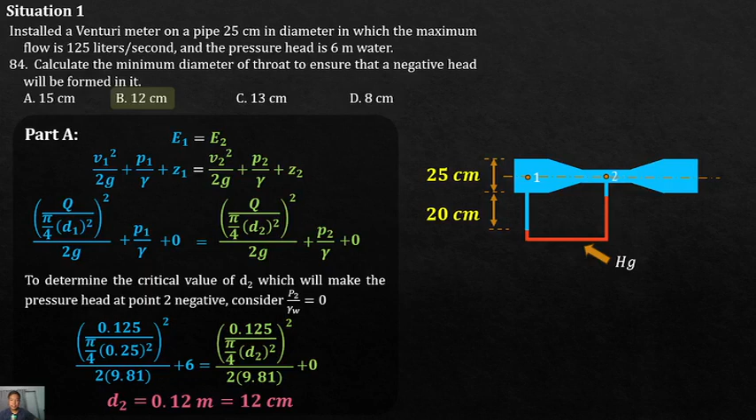Answer for number 84, letter B. Any question on this one? Okay, so I guess wala nang question. Let's now proceed to number 85.

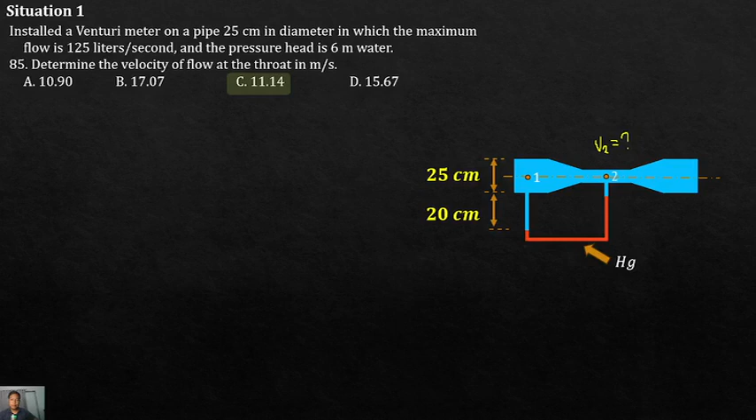So yung tanong, determine the velocity of the flow at the throat in meters per second. Bali yung velocity at point 2 yung tinatanong. Ngayon, para dito, yung equation natin na gagamitin is just yung equation natin for velocity, with respect to the given Q and yung value ng D2 na na-compute natin from part A. So Q again is 125 liters per second, that is 0.125.

Over pi over 4 times yung value ng ating diameter at point 2, at yung 4 decimal place is 0.1195. So makukuha natin ang value of velocity at point 2, and that is 11.14. Letter C.

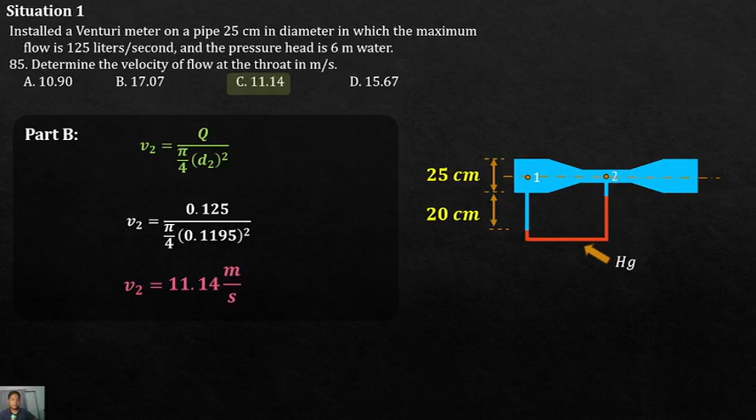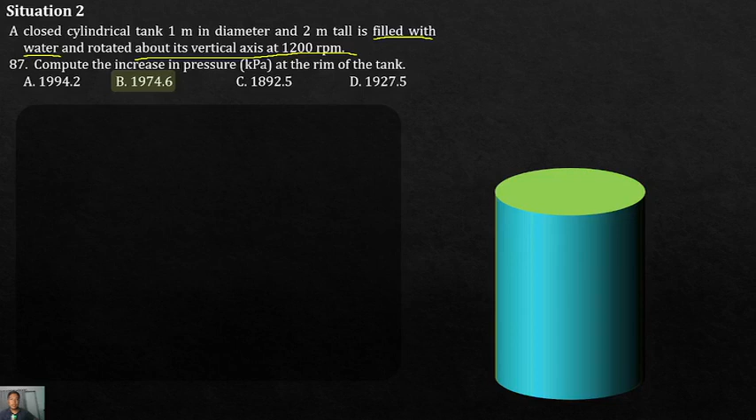So we have here a closed tank that is filled with water. Binanggit po dito na punong-puno yung ating tank. Even if it's filled out, sinabi sa problem na the tank is still rotated about its vertical axis at 1,200 RPM. Take note natin yung diameter ng tank natin, that is 1 meter, at meron siyang length o height na 2 meters.

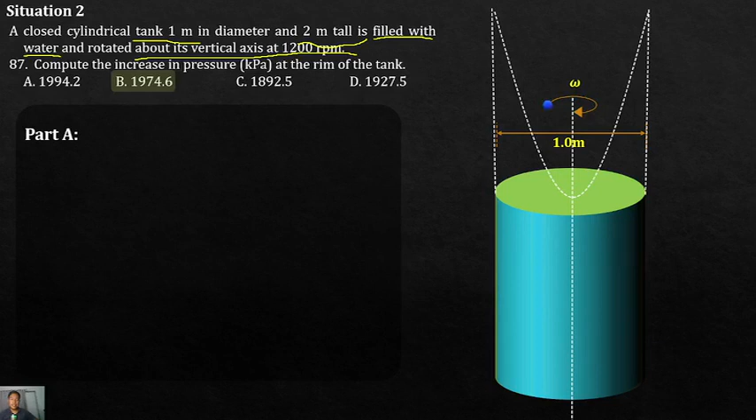Kapag pinaikot yan, kapag puno po, yung free body diagram ng ating paraboloid is an imaginary paraboloid na sa taas ng ating tank. Ganyan po ang ating paraboloid o yung ating mangyayari sa ating tubig. Again, that's imaginary kasi po closed yung ating tank.

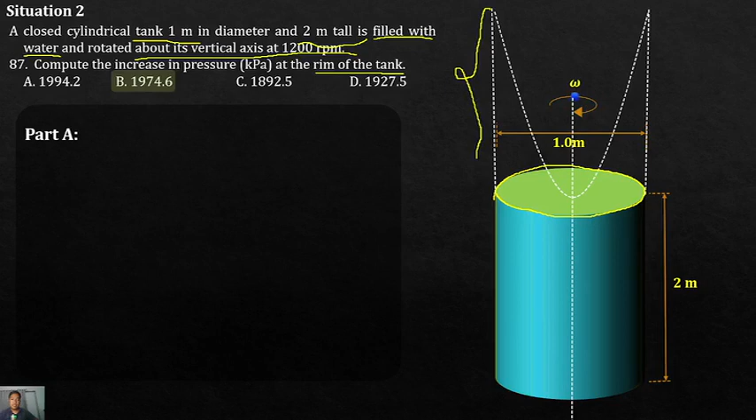So first, para malaman natin yung binabanggit po palang rim of the tank — yun po yung baba ng ating tank, bali dito. At sa illustration natin, since two-dimensional lang yan, yung palibot sa rim is represented by the pressure dito sa gilid ng ating imaginary paraboloid. So initially, nung hindi pa pinaikot, yung pressure is with respect lang at this height.

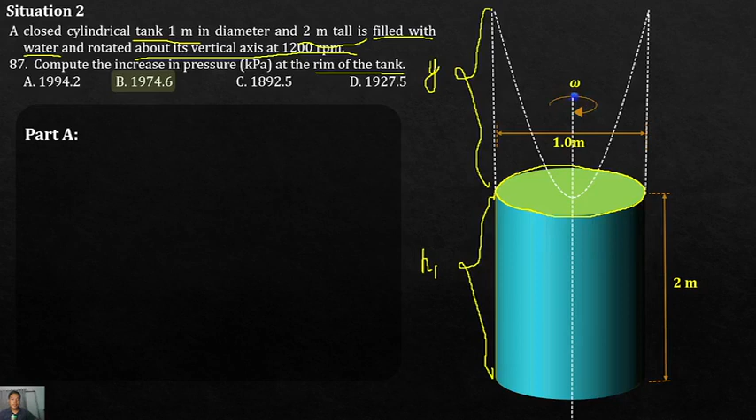Ibig sabihin, yung increase ng pressure sa rim ay caused by the height of the paraboloid, dahil tubig din itong part na to — this part right here, that's water sa imaginary paraboloid natin. So since hindi naman binanggit yung total pressure sa rim, ang tinanong ay increase in pressure, at ang increase in pressure ay caused by the paraboloid. Therefore, ang kukunin lang natin is yung value ng y dito sa inangat ng ating paraboloid.

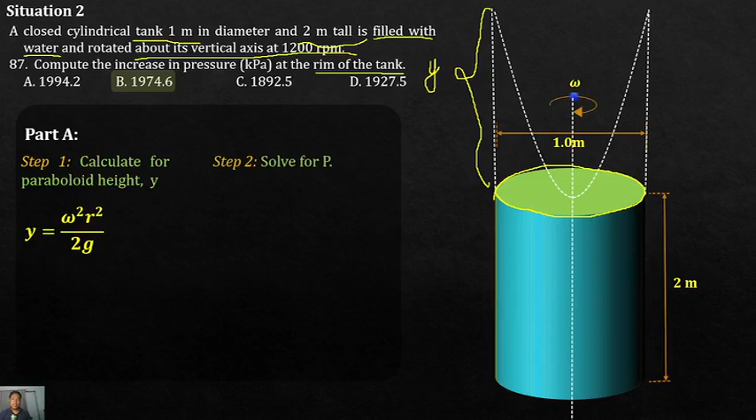Step 1: calculate for the height of the paraboloid, y, at that is omega squared r squared over twice the value of our gravity. Once na-compute mo na yung y, next step is i-compute mo na yung pressure, at that is just product — alam naman natin yung formula ng pressure, gamma height lang po yan. That is gamma ng liquid, in this case water, times yung height ng ating paraboloid. So pag kinompute mo yan, yun yung pressure dito sa gilid, at that represents the additional pressure sa rim ng ating tank. Nakuha po ba?

So, that's the framework of our solution. Now, since we already have the value of omega, that is 1,200, we have the value of the diameter, that's 1.0.

Let's get half of that, that would be the radius. And the value of gravity, that is constant, 9.81. So we can now compute for y. That would be the value of omega, 1,200, times the conversion factor, don't forget, RPM to rad per second, we need to multiply by pi over 30. Times, don't forget to raise that omega to the power of 2, times the radius, so half of 1.0, so that's 0.5. And then 2 times the constant value of gravity or our gravitational acceleration, and that is 9.81. So you now have the value of y, and that would be 201.284.

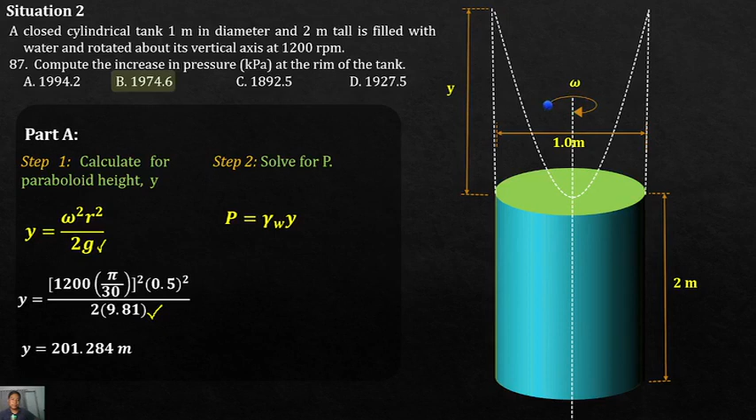Now, if we compare that with the height of the tank, 2 meters, so it's very far, very tall, our height of the imaginary paraboloid, 201.284. Now, we don't stop there. We just finished step 1. Next, multiply that with the value of the unit weight of water so that you'll be able to compute the pressure at the paraboloid, which contributes to the increase in pressure at the rim. So let's substitute, unit weight of water, that's 9.81, times the value of the height of the paraboloid so that we can now finally compute for the pressure at the rim. So, if you use your calculator, you'll get the value of P, and that is 1,974.595 kilopascal. Letter B.

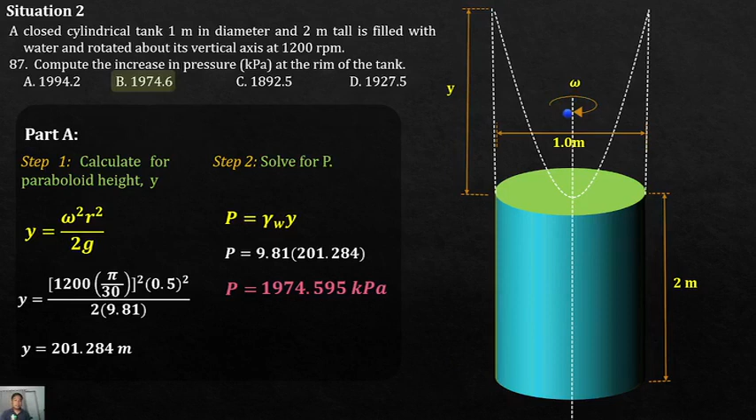Next, number 88. Compute the increase in pressure at the center bottom of the tank. So, if you look at our paraboloid, here at the center, there's nothing there. We don't have the height of water there. That means there's no increase in pressure here at the center. That means the answer is 0. So again, the analysis there, that's why we don't have height there. Because whatever is the height of the paraboloid, it always touches the top surface of our tank. And that only happens if we have a full tank. So, that means the vertex of our parabola is always at the top of our tank, when we draw the imaginary paraboloid, if our tank is closed. So, that means pressure at the center is equal to 0.

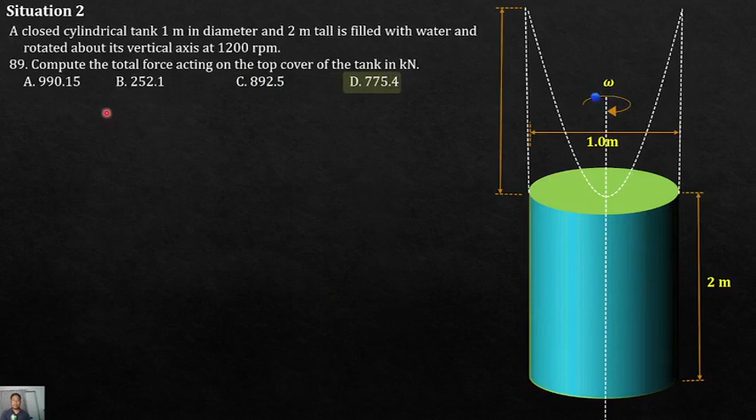Next problem, problem 89. Compute the total force acting on the top cover of the tank in kilonewtons. So, in analyzing this, remember that the water at the top is this. So, the pressure of the imaginary paraboloid that is exerted towards the top surface or the top cover of the tank, we have there a pressure force. Okay, let's call that F1. So, the question is, let's call it F1.

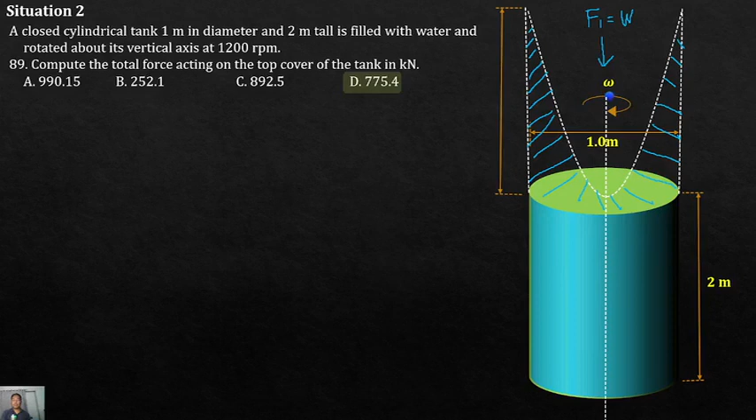So the question, how are we going to compute for the force applied by the pressure of this imaginary paraboloid at the top? Now, since we're solving for force, actually that's equivalent to the weight of the water. So, the force that is applied by the water there is just simply the weight of the water at the top of our tank. That's the weight of our imaginary paraboloid. And we have a formula from curved fluid statics, that the weight of water on a curved surface is equal to unit weight of the liquid, in this case water, times the volume. Right? And that's what we'll do here.

That's our analysis. Let's just get the weight of the water at the top of our tank cover. And that's it, that's the total force acting there. Now, the challenge here is how do we compute for the volume of water here? Now, if you remember, the volume of the paraboloid, in this case, it's just air, has nothing in it, is half of the area or half of the volume of our cylinder, right? So the formula is 1/2 pi r squared y. Because actually, the volume of the paraboloid is half of the tank given our y.

So, that y, that will be the height of our imaginary tank. The volume of the paraboloid is half of the volume of the cylinder that this parabola or paraboloid can fit into. So, that means if the volume of the paraboloid is half of the volume of the cylinder, so the volume of the water is also equivalent to the other half. This is also how our computation of the volume of this water will turn out. That is 1 minus half of the volume of this paraboloid, and that is just equal to 1/2 pi r squared y.

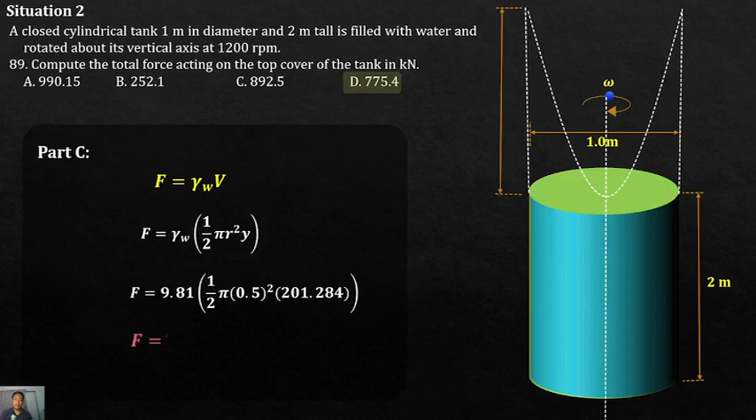So, unit weight of water, walang problema. We know that value as 9.81 kasi kilonewtons yung question. Radius, so kalahati lang po ng 1. Yung y is yung na-compute natin na 200 plus value kanina. So, substitute lang po natin. Then, we can now solve for F directly. That is 775.4 kilonewtons. Letter D.

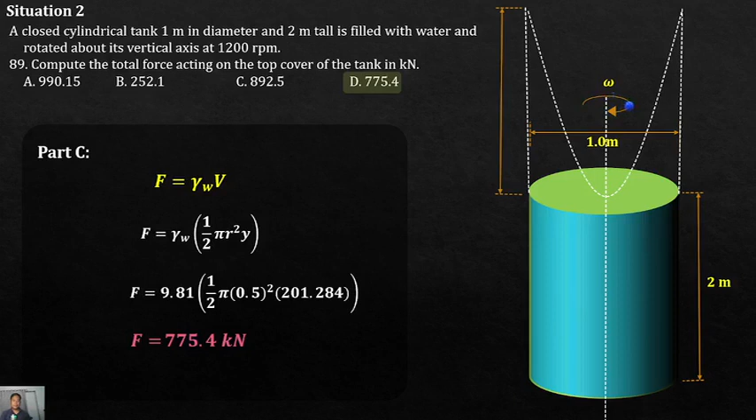Next, solve natin yung situation 3. So, I think this is a repeated problem. Lumabas din to nung module 1, no? So, I hope na nakuha din ninyo yung solution dito. Now, itong problem na to, isa to sa according sa statistics, nahirapan yung mga students during sa module 1. So, paano ulit ito sinolve? So, basahin muna natin.

Situation 3: a pump with a shaft input of 7.5 kilowatts and an efficiency of 70% is connected in a water line carrying 0.123 cubic meters per second. The pump has a 150 mm diameter suction line and a 120 mm diameter discharge line. The suction line enters the pump 1 meter below the discharge line. For a suction pressure of 70 kilonewtons per square meter, we're asked to solve the following: calculate the energy added per unit weight of water.

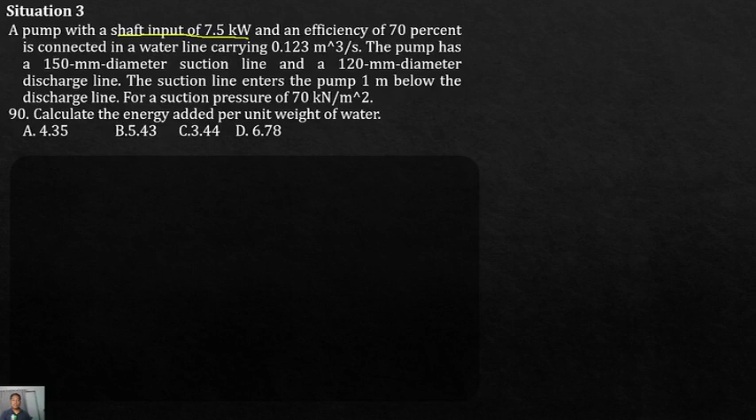Ayan, so for this one, we're given the shaft input of 7.5 kilowatts. So, pag sinabi mong shaft input, we're referring there to the power input. Power input is 7.5 kilowatts. And then you're also given the efficiency of 70%. Efficiency equals 70%.

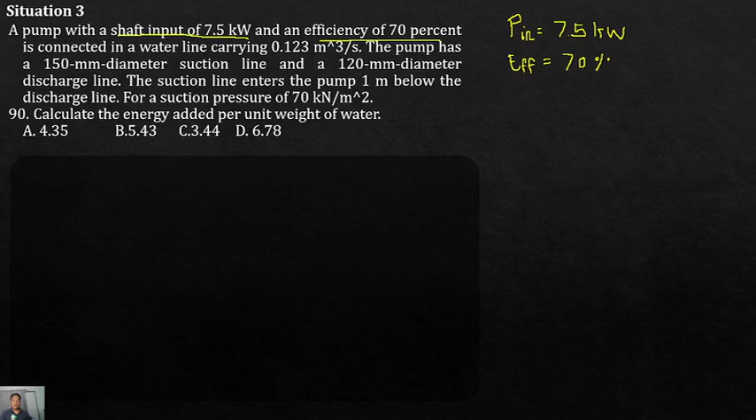And is connected in a water line carrying 0.123. So if this is our pump, ayan, meron pala akong mga values na given dito. So our input is 7,500 watts, bale 7.5, no, convert lang natin yan sa watts, times 1,000. Kaya naging 7,500 watts. Efficiency of the pump that's given 70%. Yung Q din natin given 0.123 which is mentioned here. Just ko lang to para hindi redundant.

The pump has a 150 mm diameter suction line. So ito po yung pump natin and kung papansin nyo meron tayong dalawang hole. So for the suction, dito po yan nangyayari. Suction. So yung horizontal yung suction natin and yung ating discharge is vertical. Discharge. Okay? See.

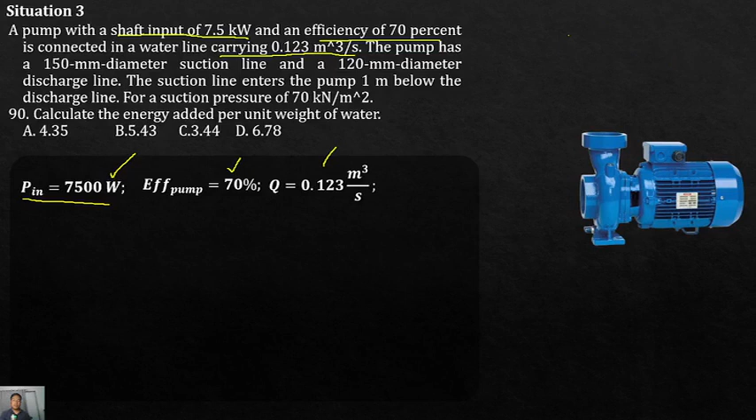So, yan yung pipe natin for suction. So, subscript S, yung gamit natin to denote suction. Ang given na diameter for the suction line is 150 mm diameter, and that is 0.15. Kuha po. So, dinivide lang yan sa 1,000. And a 120 mm diameter discharge line. So, yung discharge po natin is again yung paakyat. Discharge is denoted as subscript D here for the diameter, and that is a value of 0.12.

Binanggit dito, the suction line enters the pump 1 meter below the discharge line. So, paano natin yan i-interpret? The line of suction is 1 meter below the discharge line. Okay, so gawin na natin reference yung ating suction and then count tayo ng 1 meter paakyat. Ganun. So, bali, yung point sa discharge na tinutukoy natin is ganyan lang. Okay, so this will be point 1, and then dito naman, point 2. Okay, ganyan lang. Isasin ko lang to kasi may drawing naman ako.

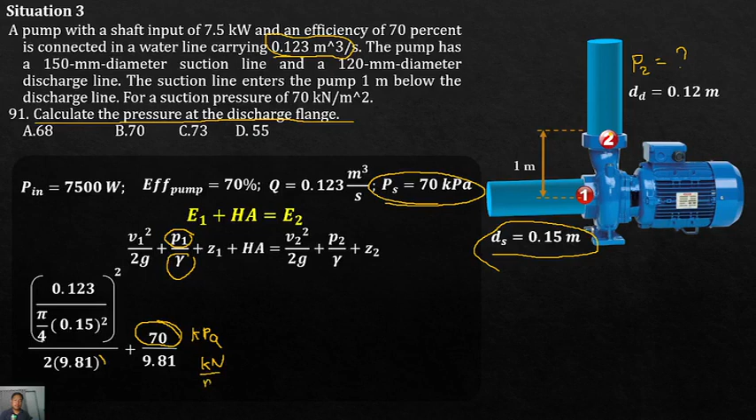Unit consistency, guys. Plus, now take note, for Z1, this point 1 is the lower elevation, so that's what we'll assume as our datum, so that's 0.

Plus head added - that's what we computed earlier, that was 4.35. Okay, equals.

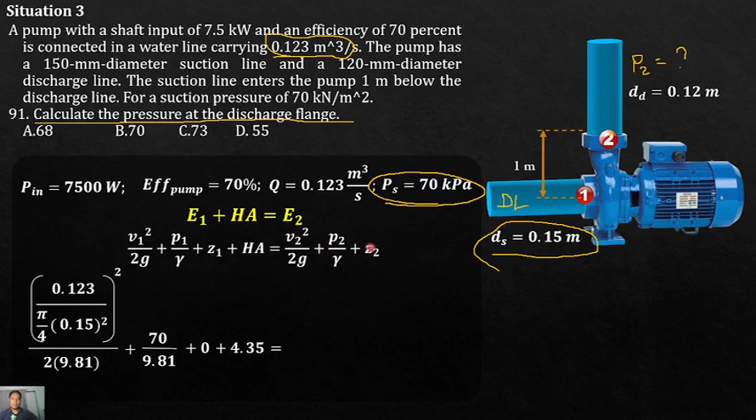Now let's go to the right side of our equation, for the energy at point 2. First is the velocity at point 2, so again Q over A is what we'll use for V2.

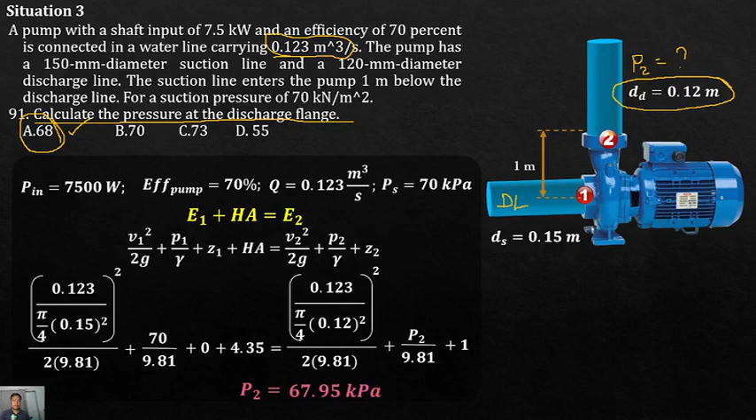Finally, problem 92: calculate the rise in the hydraulic grade line across the pump. So what is the hydraulic grade line? Let's review. The hydraulic grade line is the graph of the total potential energy.

For point 1, it's the sum of the pressure head at point 1 and the elevation. For point 2, it's the pressure head at point 2 plus Z2. If you add velocity head to that, it becomes the energy grade line.

Let's plot this so it's more visual, making the solution easier to understand. So, calculate the rise in the hydraulic grade line across the pump. Remember, this is what we need. For Z, remember that point 1 is our datum, right?

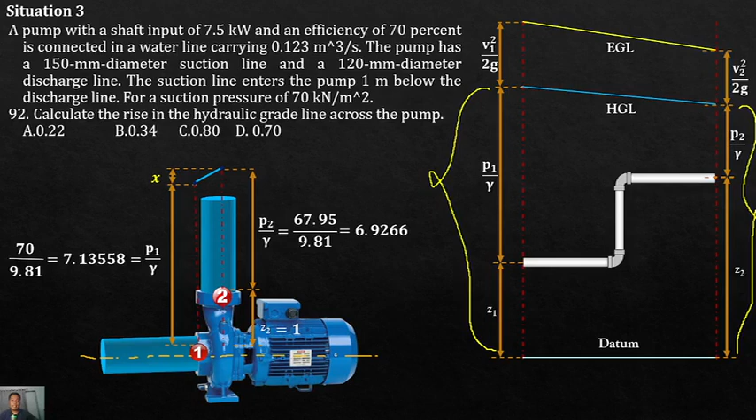Yan na yung inangat ng ating energy or potential energy. Yan yung tinatanong dyan. Since meron naman tayong height ng right side, which is mas mataas, add mo lang sila.

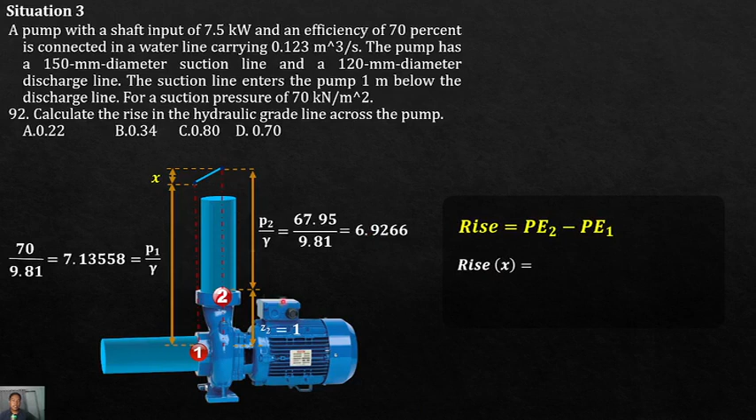Yung potential energy sa kanan at point 2, that is 1 plus 6.9266. Inad lang natin si 6.9266 plus si 1, so that's why we have that value for potential energy at point 2. Minus potential energy at point 1, ito po yun, 7.13558. Solve natin, we'll get the value of rise.

And that is 0.7912. The answer there would be letter C.

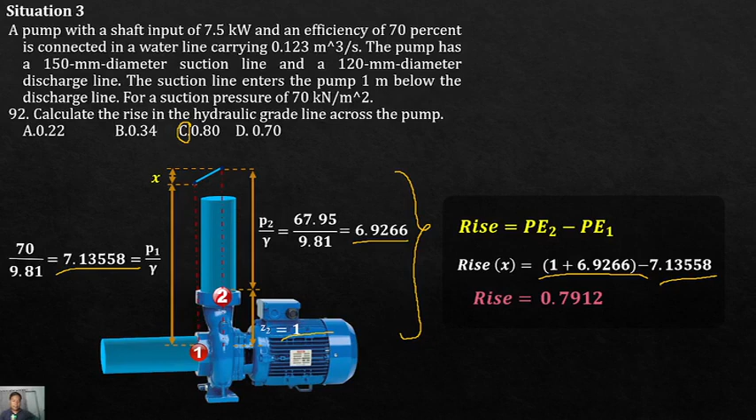Sige, so let's continue for situation 4. A horizontal cylindrical pressure tank is 5 meters long and 0.8 meters in radius. The tank is filled with equal volume of seawater with a specific gravity of 1.025 and oil with a specific gravity of 0.76. The pressure gauge at the bottom of the tank reads 40 psi. Take note ko lang dito, ang reading daw is 40 psi.

Now the question is, what is the pressure at the top of the tank in kilopascal? Ano daw yung pressure dito sa taas? If we're to put here an imaginary gauge pressure, ano yung magiging value dito? Pressure at the top.

Ganito, no? To solve for the pressure at the top, remember yung principle ng pressure: pressure is always measured vertically.

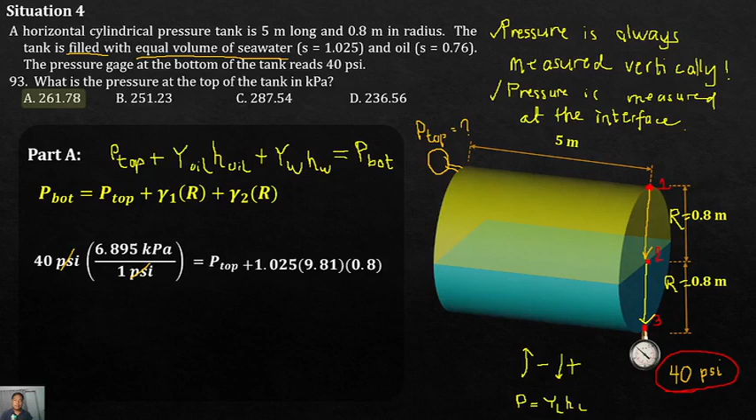Equals pressure at the top, which is unknown. Unit weight ng oil natin, sorry, this is supposed to be 0.76, no? Kasi siya yung lighter one. Anyway, pwede naman tong mag-interchange kasi commutative property, no? So, yung naano ko lang dito is the height, unit weight of the water. So, 1.025, that's the specific gravity of the seawater, times 9.81 times yung radius natin. That would be the unit weight of water. Plus naman po ang unit weight naman ng ating oil. That is 0.76 times 9.81. Yan yung unit weight ng oil natin. Times yung radius ulit, which is 0.8, which is this one. Okay? So, I hope nakuha yun.

And then, kung kompleto na, we're now ready to solve for the pressure at the top. And that would be 261.791. So, that would be letter A.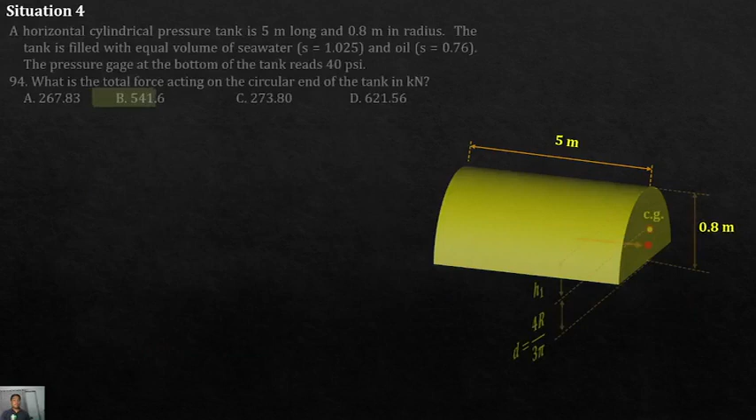Proceed po tayo. Problem 94. What is the total force acting on the circular end of the tank?

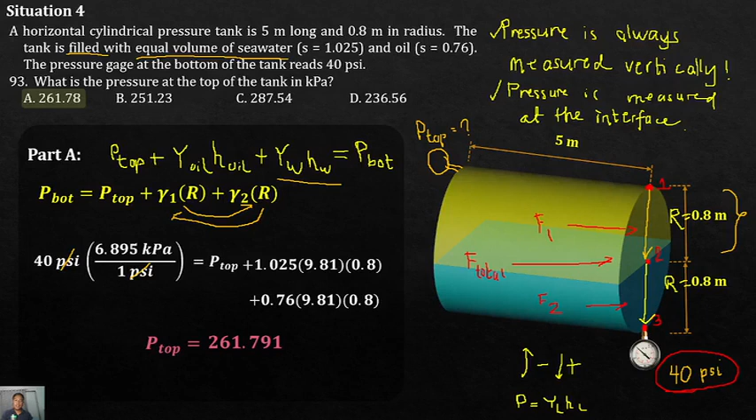Ayan. So, the total force po is, uh, that can be computed. Kunin muna natin no, yung force acting sa oil and then force acting sa tubig or sa seawater. And then kunin natin yung resultant, no, F total. Add mo lang F1 at F2. So solve natin isa-isa no, yung force acting in each liquid. So unahin natin yung force acting dito sa ating tawag dito, oil. Ayan, so F1. Hanapin mo natin si F1.

Now, force po is acting no, at the center of pressure. And for a semicircle, the center of pressure is below the center, the center of gravity is above the center of pressure. Remember, ang tanong is force acting at the end of the tank. So, ibig sabihin, yung area na concern tayo is itong area na to. Yung semicircle.

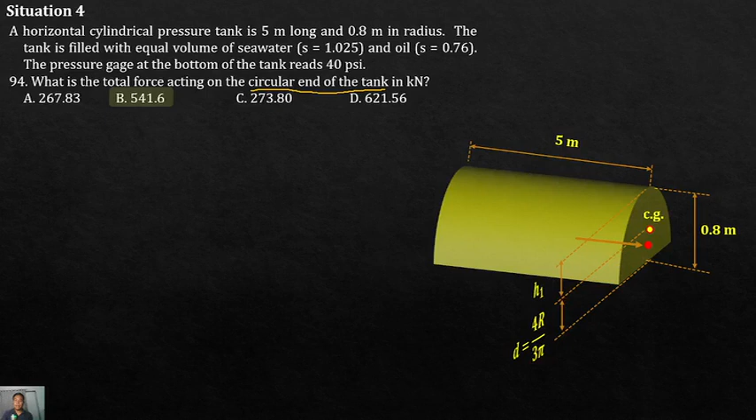Now, alam natin, force, hydrostatic force, diba, is we need to find first the pressure at the centroid. And for the pressure at the centroid, kailangan natin ang value ng H1. So, paano natin mahanap H1? H1 is equivalent to the value of bar H. So, that is from the surface to the centroid. So, we can compute for H1 if we subtract yung radius at saka yung centroidal distance ng ating semicircle. Ito yung formula ng centroidal distance, 4r over 3 pi measured from the base of the semicircle. Dito po, akit ka ng ganyan, 4r over 3 pi. So therefore, H1 is just 0.8 minus D.

Again, from this equation, alam natin, pressure equals force over area. And yung governing equation natin, cross multiply lang to, we'll get the value of F1. Ito yung F1 natin. So, we need to find first the value of pressure. Area, walang problema. Diba? Kalahati lang yan ng area ng circle.

For pressure at point 1, ito yung magiging diskarte natin. So, again, pressure is just vertical measurement. Since sa taas, meron yung pressure, so consider natin yan, plus yung gamma times papunta dito sa center of gravity, kasi pressure sa center of gravity yung kailangan natin. So pressure sa center of gravity is just gamma times H1, which is this height. Now, H1 is R, ito po yung R natin, minus yung ating centroidal distance, D. Diba? Again, ito yon minus this height. So, that would be our H1.

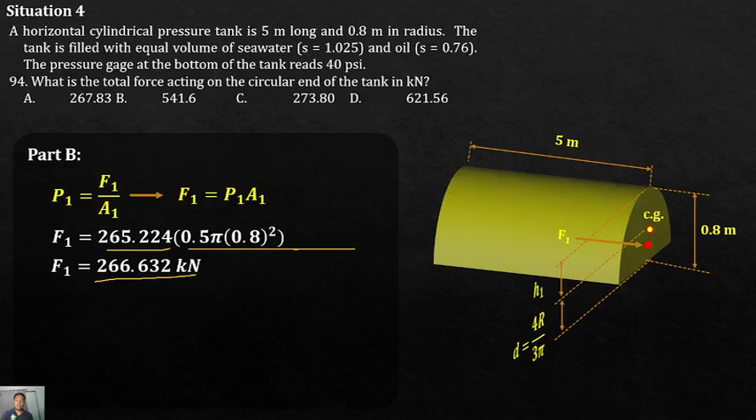So that will get the value of F1. Since kalahati lang yan ng area ng circle, so 0.5 times area ng circle, pi times the radius, 0.8 squared, we'll get F1 as 266.632. So ganyan lang yung pag-compute ng force sa centroid, force acting dito sa oil. So, okay na si F1.

Next, solve natin yung force acting dito naman sa seawater. Again, that force is acting dito po sa center of pressure. Pero, for us to find for force 2, kailangan natin yung pressure dito naman at the centroid. Okay? So, solve natin yung pressure sa centroid.

Again, yung pag-compute natin ng pressure, magsimula tayo dito sa pressure sa top. Plus, again, find the interface. Ito yung pangalawang interface natin. Ang point na to.

So, unit weight times that radius. Compute natin yung pressure at point 2. Since pressure at the centroid yung gusto natin, hanggang dito lang, di ba? Kailangan nating height is yung centroidal distance na, which is this one up until here. Take note, ang centroidal distance po is measured always from the base.

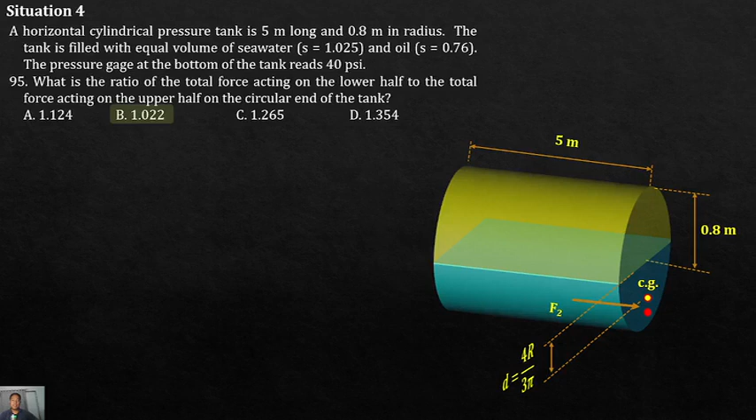So, acting at the lower half, yan po ay ang F2, so F2 yung numerator. And acting on the upper half, is yung F1 naman. So, F2 over F1. Substitute mo lang yung values na na-compute natin, we'll get the value of ratio, that is equal to 1.022. Letter B.

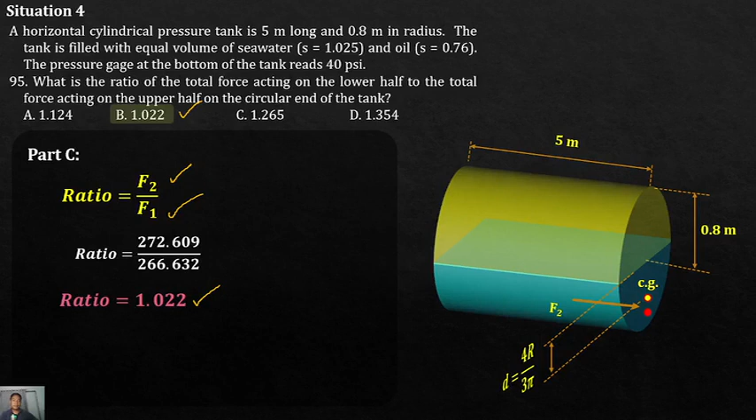Ito, konti lang to. Last na to, situation 5, and then I'll just do another recording for the rest of the problems na hindi ko ma-discuss ngayon.

So, the fuel gauge for a gasoline tank in a car reads proportional to its bottom gauge. The tank is 50 centimeters deep, and accidentally contaminated with 8 cm of water. The specific gravity of gasoline is 0.72. What is the gauge reading when the tank is filled with gasoline? So, ito yung first scenario. We have here the tank, rectangular tank, punong-puno with a height of 50 centimeters.

Okay, so alam naman natin yung formula ng pressure, yan po ay unit weight of the liquid times the height. In this case, the gasoline is the liquid. So, unit weight is just, multiply mo lang, specific gravity, 0.72, times yung ating unit weight of water, and then 50 cm yung ating height. Convert that to meters, that is 0.5. We'll get the value of P, and that is 3.532 kilopascal. Letter B.

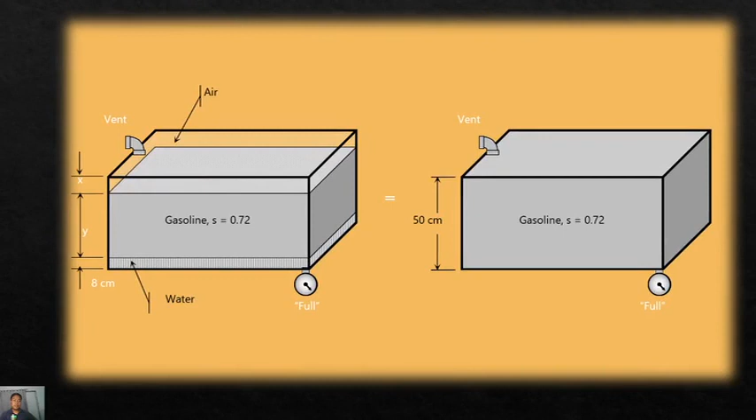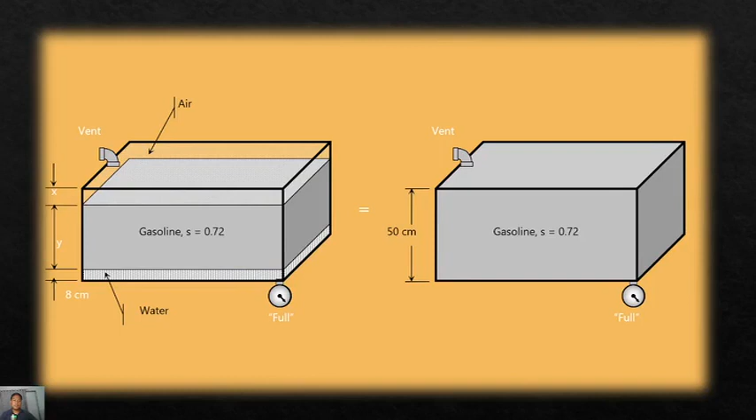So, we have here the height of the water, that's 8 centimeters. And then yung height ng gasoline, syempre hindi natin alam, no? And then yung tinatanong is yung X, yung height ng ating air.

Okay, so to solve for the height of the air, ang gagamitin natin is yung principle lang ng pressure. So yung pressure dito sa kanan is just equal sa pressure dito sa kaliwa. So yung resolve natin na pressure for number 1, gagamitin natin yon to find for the height of the air here.

But for this one, since yung pressure ng air is irrelevant kasi nga meron vent, so we'll just use the value of the pressure of gasoline for the liquids only. And that is, sum up natin yung pressure ng water at saka pressure ng gasolina.

Ito yan, and that is yung pressure na nasolve natin, 3.532. Unit weight ng water, 9.81. Yung height ng water, 8 cm, that's 0.08 meters. Unit weight ng gasoline natin, 0.72 times 9.81 times yung height ng gasoline, which we don't know. So solve natin yan, that would be 0.3889 meters.

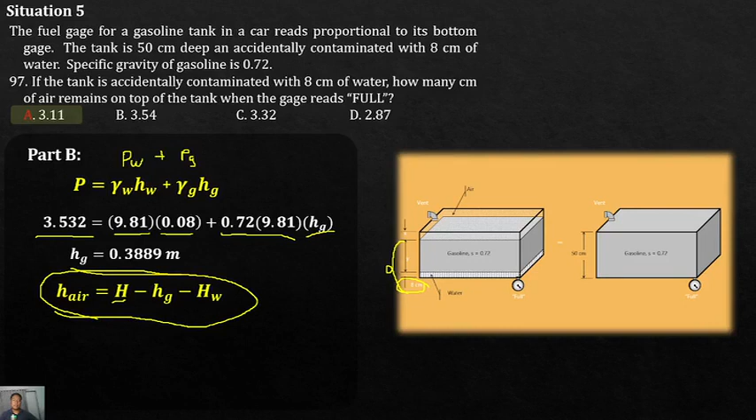So once na-compute mo na yung height ng gasoline, pwede na natin ma-compute yung height ng air using this formula: height of the tank minus height ng gasoline tsaka height ng water. So the height of the tank is ito yun, from here up until here, that is equal to 0.5.

So ito yung hinahanap natin na X. So to find for x, i-minus lang natin si 0.5 sa height naman ng gasoline na na-compute natin, 0.3889, minus ulit sa height ng water na na-contaminate, 0.08. So we'll get the height of air as 0.0311 meters. Convert yan to cm, we'll get 3.11 centimeters.

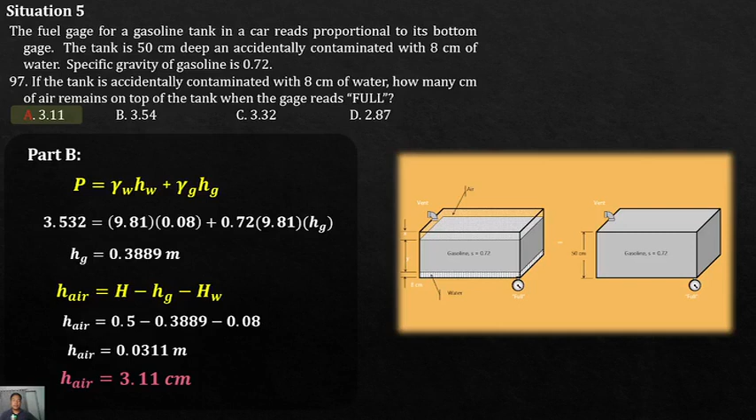Next, if the tank has a uniform horizontal cross-sectional area of 0.8 square meters, how many liters of gasoline are required to fill the tank? So binigyan tayo ng cross-section, bale ito, cross-sectional area.

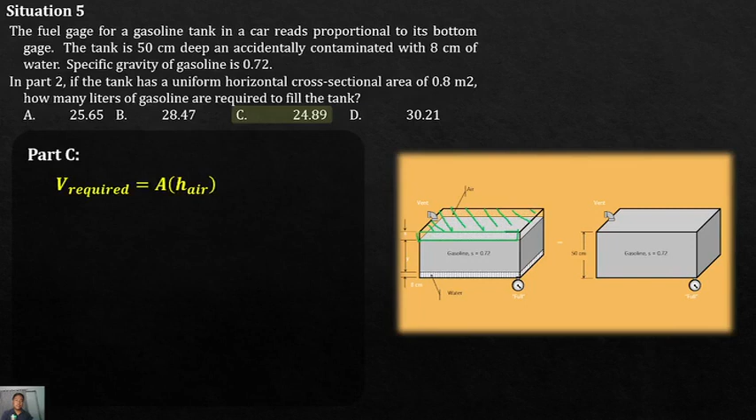Ang tanong is, how much is the volume? So kailangan natin yung height, yung x times yung area to get the volume. Ganyan lang, so area times height lang yan. Area is given as 0.8.

Tapos yung nasolve natin na height ng air, 0.0311, we'll get the value of the volume, 0.02488 cubic meters, times 1,000 will get the volume required. That would be 24.88 liters. Letter C.